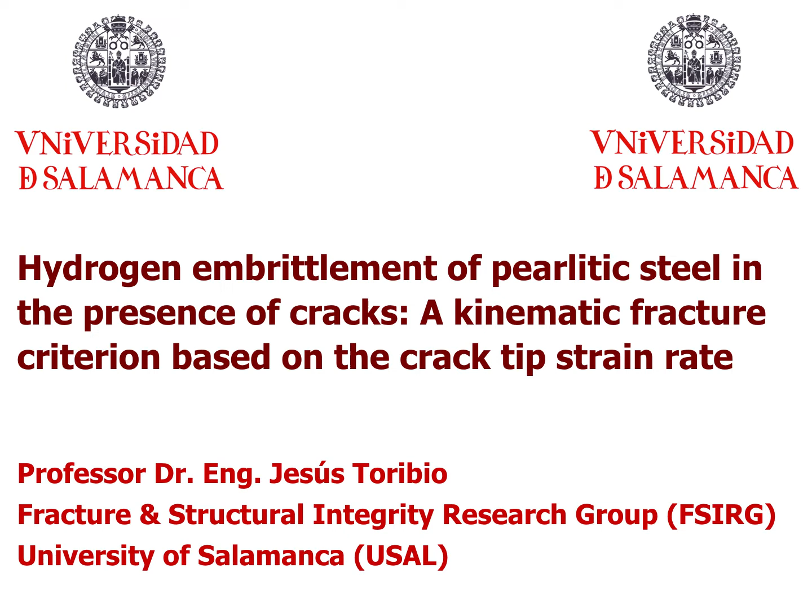I am going to divide my talk according to the following outline. First, introduction. Second, crack tip strain rate. Third, experimental program. Fourth, fracture criterion. And fifth, conclusions. First of all, the introduction, the motivation.

It is well known that environmental assisted cracking, EAC, or in traditional terms, stress corrosion cracking, SCC processes, depend markedly on kinematic variables such as the strain rate, the dependence being non-monotonic for localized anodic dissolution or pure stress corrosion cracking, and monotonic for hydrogen embrittlement or hydrogen-assisted cracking.

When pre-cracked or notched specimens are used to study environmental assisted cracking, the local strain rate at the crack tip, the crack tip strain rate, is the variable governing the process. It is the local strain rate just at the crack tip or in its vicinity, the so-called crack tip strain rate.

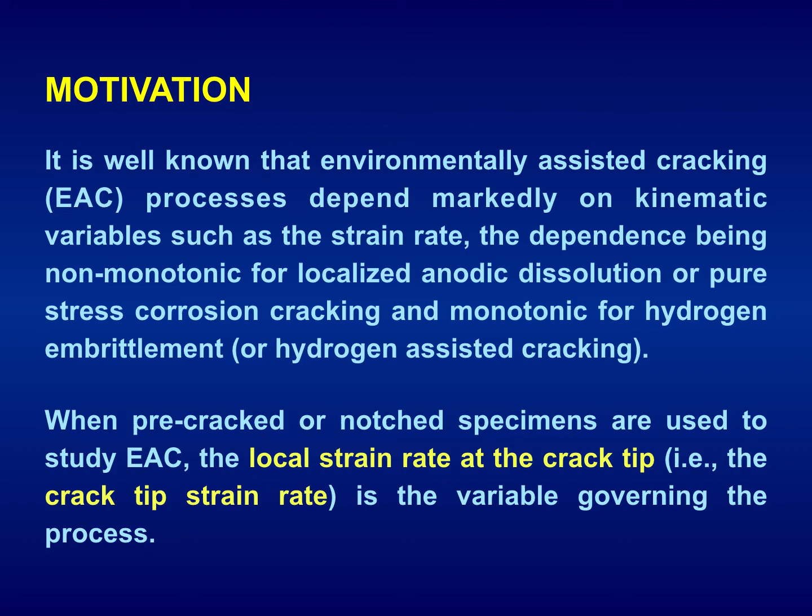Second, the concept of crack tip strain rate. This is the schematic of the crack tip. In this paper, the traditional solution in linear elastic fracture mechanics is used. Here we have the polar length R, the polar angle theta, the vertical coordinate Z_CT, the vertical displacement V_CT, and the local reference length L_CT, crack tip length.

According to this schematic, we compute the crack tip strain rate as a time and space average of the local strain rate at the crack tip. This instantaneous value of the crack tip strain rate is averaged over time from 0 to critical time to failure during the test, and in addition, it is averaged over the critical distance. We use the critical distance concept, CDC, or the concept of zone affected by hydrogen. In case of pearlitic steel, it is the so-called tearing topography surface, TTS zone.

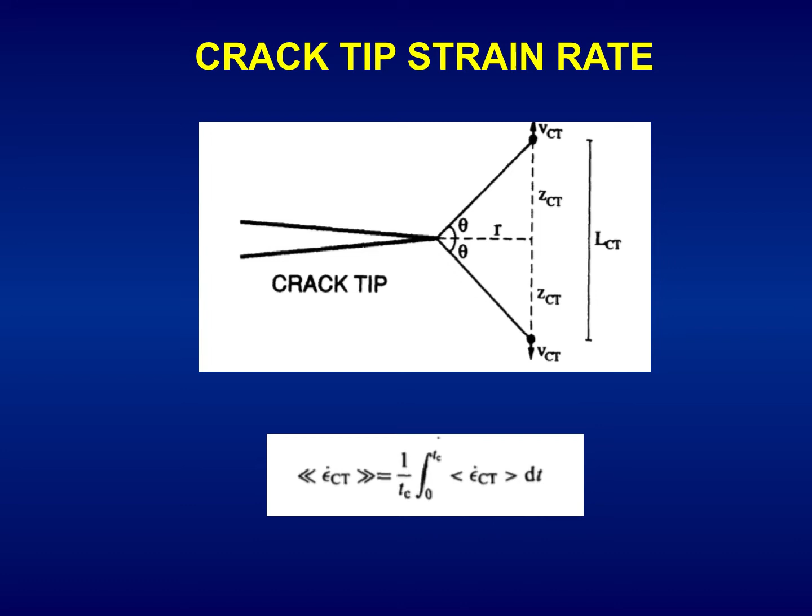With this average in space and time of the local strain rate at the crack tip, we apply this concept, this computational method, to the results of an experimental program on pre-cracked samples of pearlitic steel tested under hydrogen embrittlement environmental conditions.

This is the experimental setup with a potentiostat and a 3-electrode assembly: reference electrode, saturated calomel electrode, a salt bridge, platinum counter electrode, and the sample as working electrode. We use a cathodic potential, minus 1200 millivolts versus saturated calomel electrode, just to promote hydrogen embrittlement, hydrogen-assisted cracking, environmental conditions.

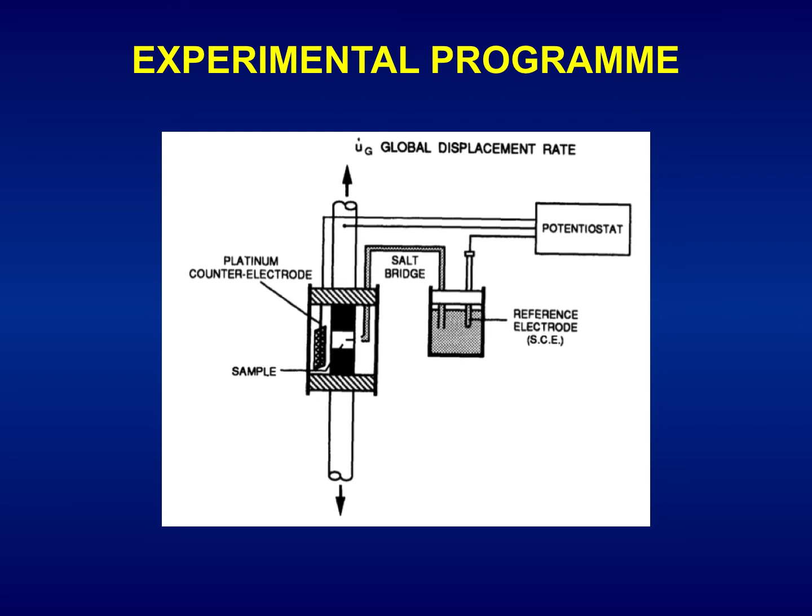This is a plot of macroscopic experimental results: failure load in hydrogen, FC, critical load in hydrogen, divided by the reference value in fracture in air with no hydrogen assistance, versus the displacement rate in meters per second. We observe the typical increasing monotonic trend of any hydrogen embrittlement test when tested against the displacement rate, the crosshead speed. There is an increasing trend.

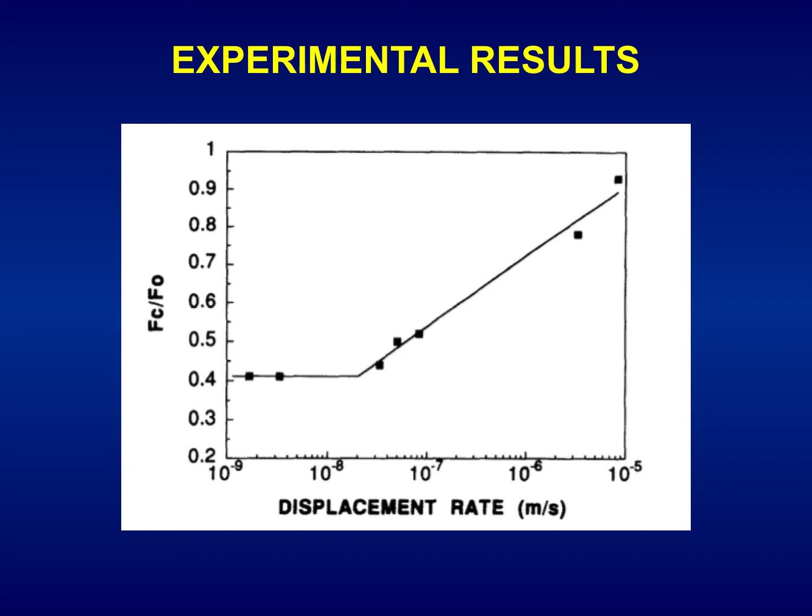The higher the displacement rate, the lesser the effect of hydrogen, because we have less time for hydrogen entrance, penetration, and diffusion into the sample, and less time for hydrogen-assisted damage. Then let's formulate a fracture criterion on the basis of the local strain rate in the vicinity of the crack tip, the so-called crack tip strain rate, CTSR. This is a sort of kinematic fracture criterion.

This kinematic fracture criterion for cracked samples is formulated by using two dimensionless variables plotted one against the other: the dimensionless stress sigma asterisk and the dimensionless strain epsilon asterisk. Sigma asterisk is computed from the critical load in the hydrogen-assisted cracking test, normalized in dimensionless form using the depth of the hydrogen-assisted microdamage region, the TTS depth, and the extension of this area.

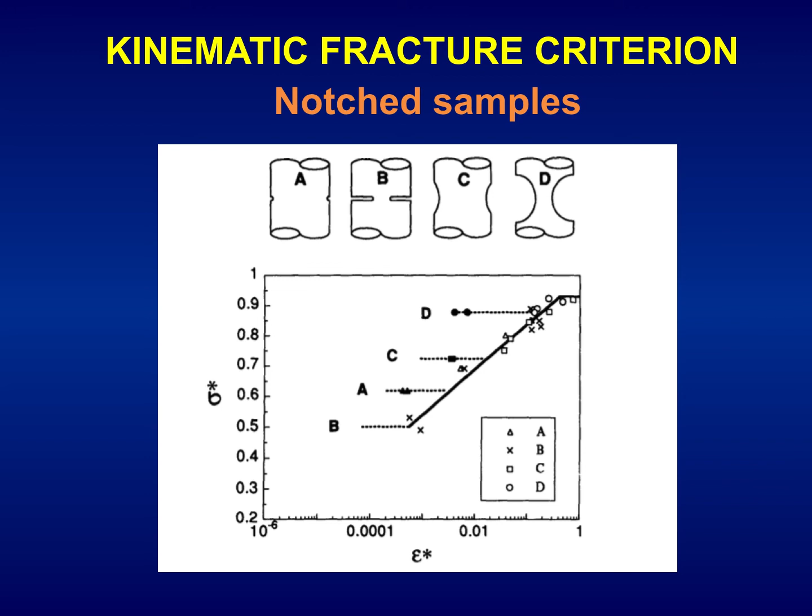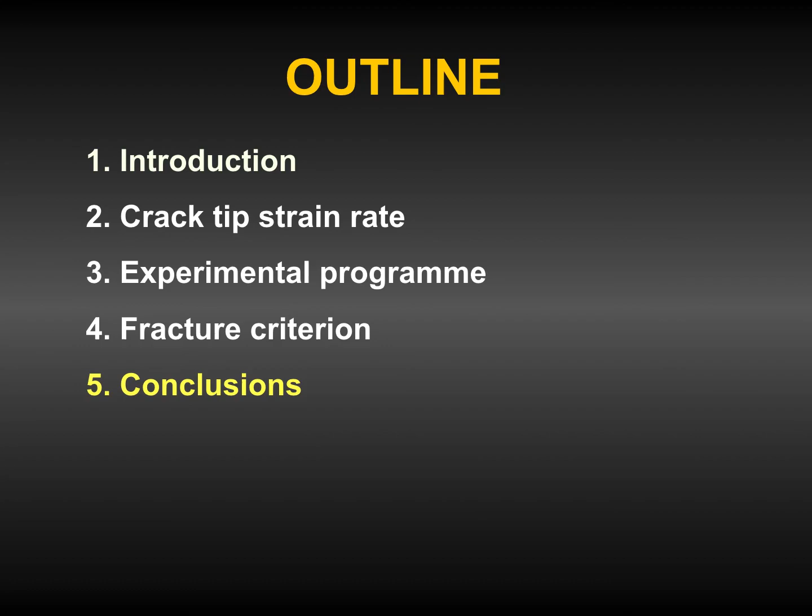A simple method was proposed to estimate the local strain rate at a crack tip, or crack tip strain rate, on the basis of approximate stress and displacement distributions in its vicinity, the crack tip stress and displacement fields. The procedure is fully analytical, approximate on the basis of linear elastic fracture mechanics principles, and thus presents clear advantages of simplicity over traditional numerical methods.

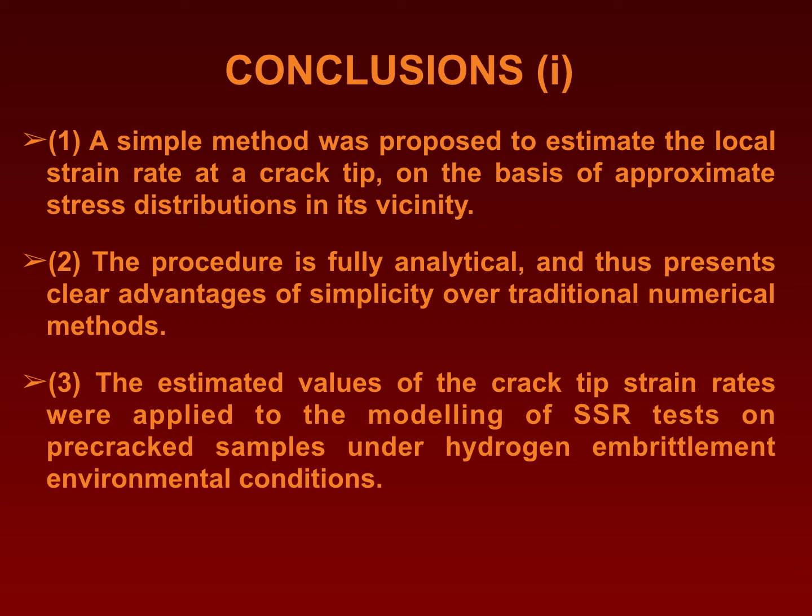The estimated values of the crack tip strain rates were applied to the modeling of slow strain rate tests on pre-cracked samples under hydrogen embrittlement conditions. Results of the model agree fairly well with previous modeling of hydrogen embrittlement on notched samples of different geometries. These results confirm the very important role of the local strain rate at the crack tip in hydrogen-assisted cracking in the presence of stress or strain concentration. The level of triaxiality constraint of the specimen geometry influences the kinematic results in hydrogen-assisted fracture.